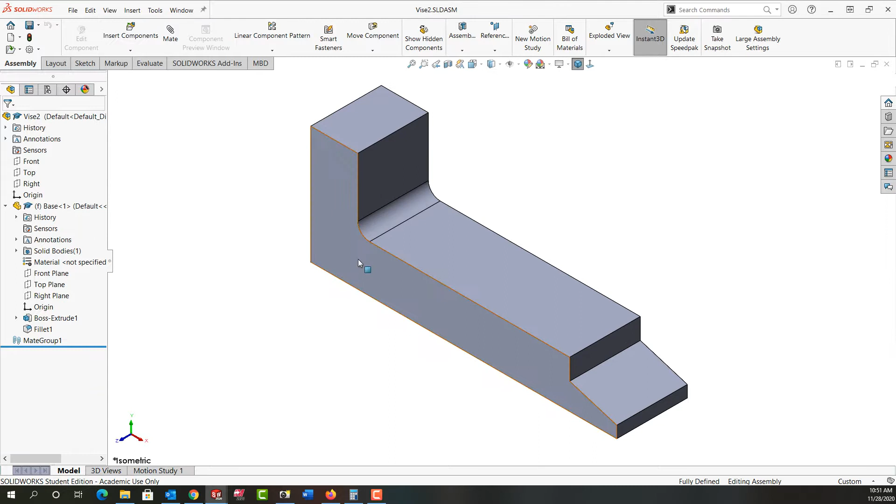In this video, I want to demonstrate how to add these tabs and this slot to our solid jaw of our vise. So first I'm going to control tab back to my other assembly. And remember, the first thing I want to do is select the part and tell it I want to edit the part. Then I'm going to rotate around so I can see the bottom. I'll select the bottom face and I'll tell it to look normal to.

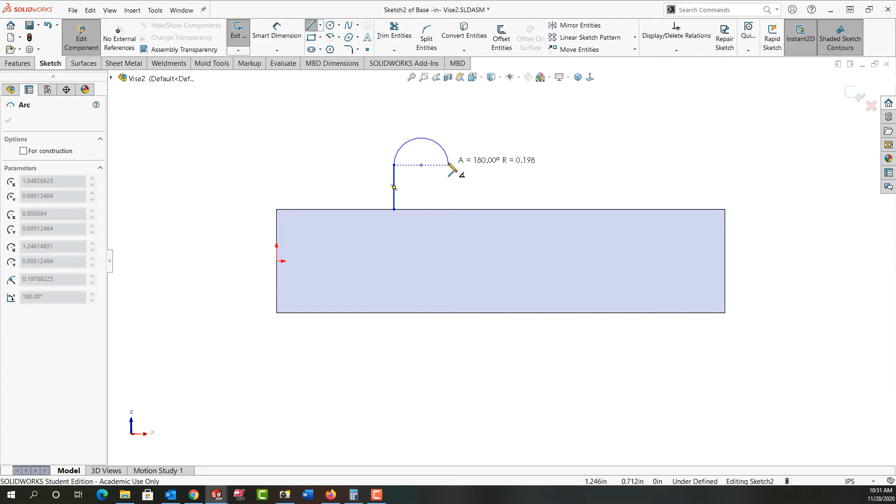And here I want to add some extrusion. So I'm going to activate extrusion. I'm going to use my mouse gesture to activate line. And I'm going to click here and move up. I'm going to move off and back, and I'm going to create this half circle. I'm going to come down, click, and close the shape.

Again, I'm going to move over here, use mouse gestures to activate circle. Draw a small circle here, and once again I'll use mouse gestures to activate smart dimensioning. And I'll add the dimensions to my part. So this radius here is 0.313. This diameter is 0.175.

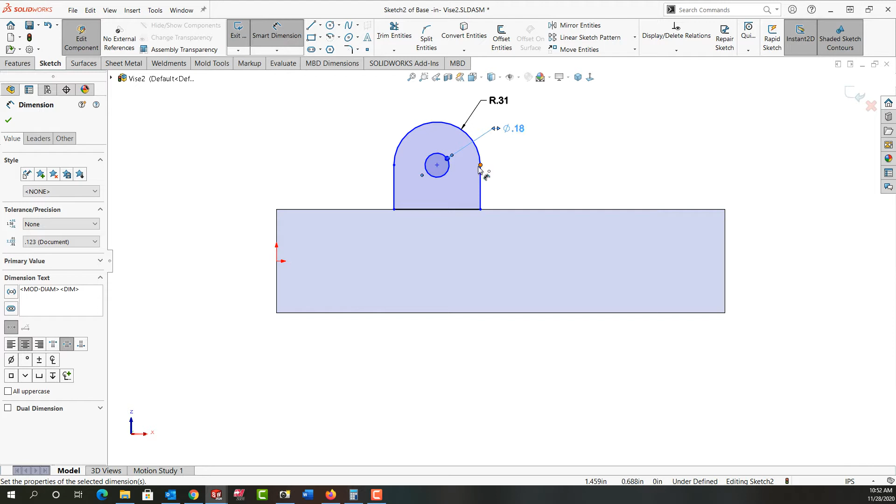From here to the outside of this arc, so I'm going to hold shift when I select the arc. And I move over and click and place it. This distance is 5/8. And from the origin to the center is 1.5 inches. So my sketch is fully defined.

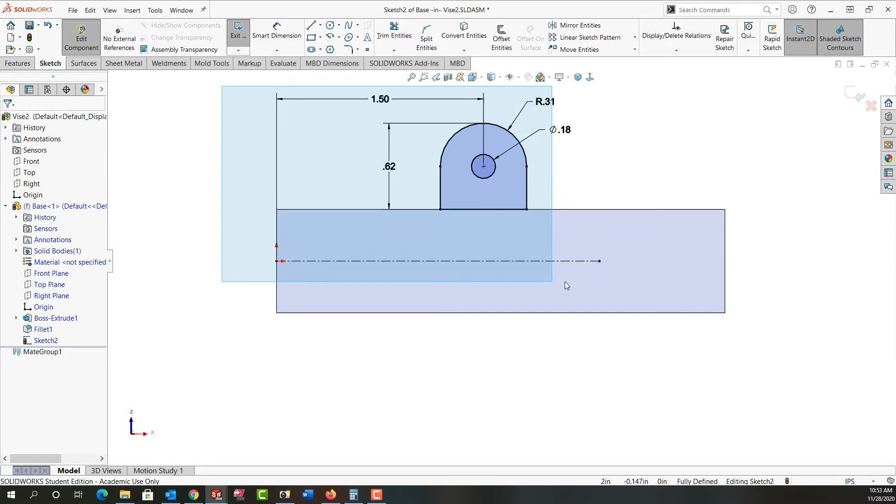I'm just going to now add a center line from the origin horizontally this way. I'll push escape. And I'm going to window select all my entities I just sketched and fully defined, as well as the center line. And then with them selected, I'm going to tell them to mirror that so that the sketch is fully defined as well.

I'll go back to the isometric view. I'll right click to exit my sketch. And I'll make the extrusion 0.2, tell it to merge the result. I can see in the preview I need to flip the direction. And I'll say OK. So that's been added. Again, notice how this is all blue because I'm editing this part.

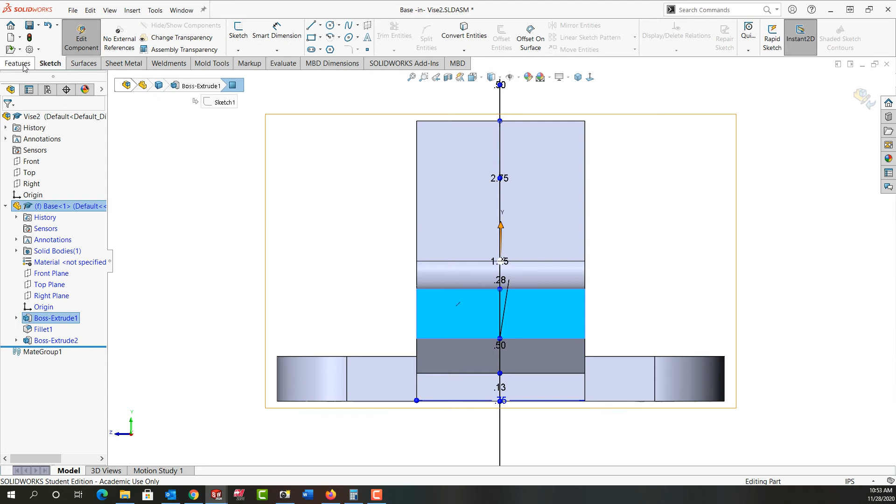So next I'm going to select this face. Again, I'll look normal to it. I'm going to come up to the feature ribbons. And I'm going to tell it this time I want to make an extrude cut, and I'll use a 2-point rectangle. I'll activate 2-point rectangle. I'll lock it to this corner, come up and click to place it.

I'll move off. Use mouse gestures to activate smart dimension. This distance here is 0.1. And this distance is 0.14. So that's fully defined. Again, I'm going to use mouse gestures to activate line. I'm going to click on the origin, come up and create this vertical line. I'll push escape, select the line again, and I'm going to make it for construction.

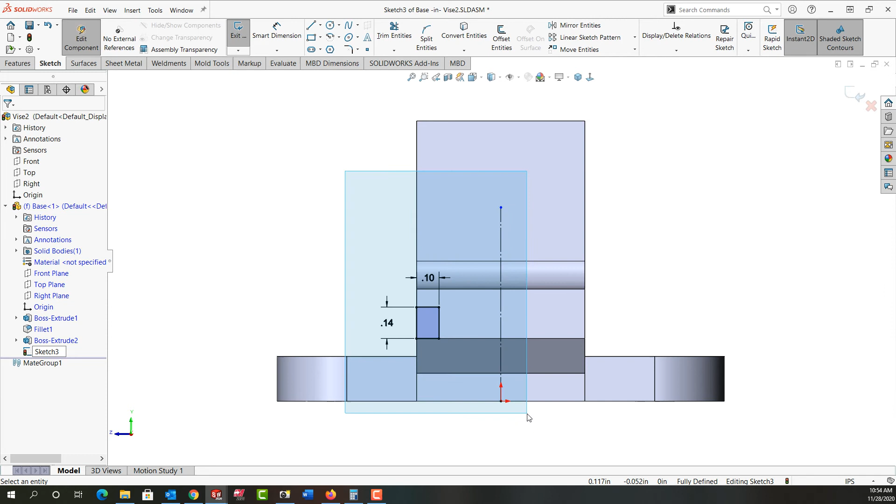And then one more time, I'll window select the rectangle and the center line, and then I'll tell it to mirror those entities. I'll look at this isometrically. I'm going to right click and exit the sketch. And for the end condition, I'm going to choose up to surface. And I'll select this face and I'll right click to accept that.

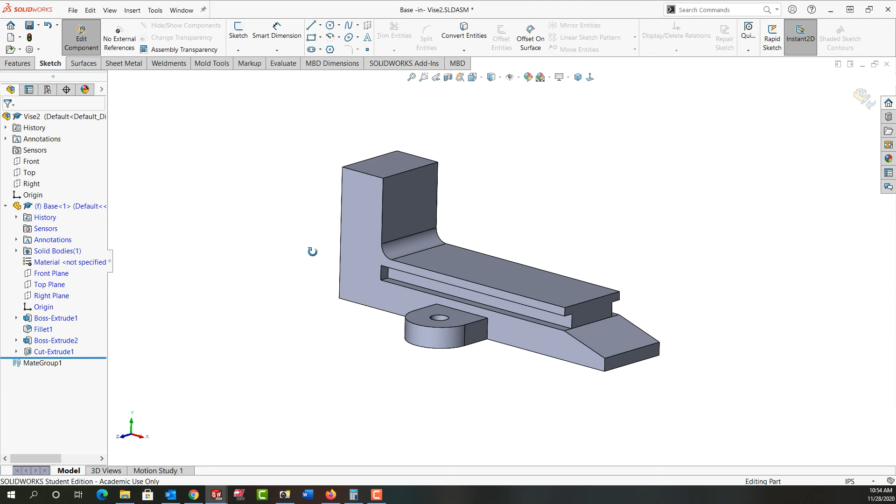Now, if this were going to be machined, it would be done typically with an end mill, and I can't have this square corner here. So I'm going to go back to the features ribbon, activate fillet, and this time I'm going to tell it I want to make a full round fillet. So I'll select this face and right click, select this face and right click, rotate around a bit, select this face and right click to create the full round fillet.

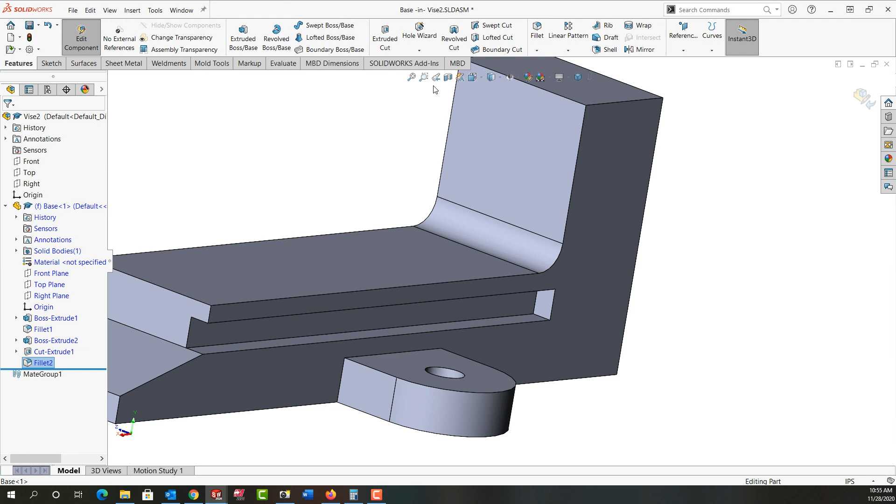I'll rotate my part around and I'll do the same on this side. I'll activate fillet, select this face, right click, select this face, right click, rotate a bit, select this face, right click. I'll go back to the isometric view. I'm going to stop editing my part, save my work, and in the next video we'll continue from there.